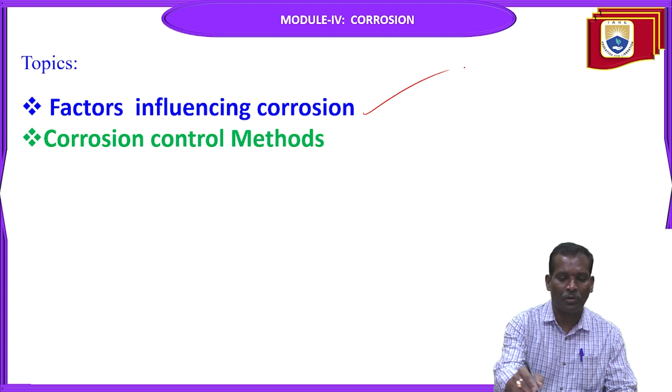So today I want to discuss the main factors influencing corrosion, the factors affecting corrosion, and then the controlling methods: how to control and prevent this corrosion. In the last session, I discussed the types of corrosion and the mechanism of corrosion. So today's topics are factors influencing corrosion and corrosion control methods.

So there are some main factors affecting the rate of corrosion. The rate and extent of corrosion mainly depends upon the nature of metal and the nature of environment. That's why we should learn the metal properties. What are the important properties of metal? First of all, you should know the material classification. What do you mean by metal? What do you mean by non-metal? What is the composition of the particular metal?

Suppose you want to design a component in mechanical engineering; first you should know the mechanical properties of the particular metal you are using: the strength, hardness, fatigue property, plasticity. All these properties you should know before you start the design. That's why the rate and extent of corrosion depends upon the nature of metal, which type of metal you are using, and the nature of environment, the atmospheric and working conditions. That is also a main factor affecting corrosion.

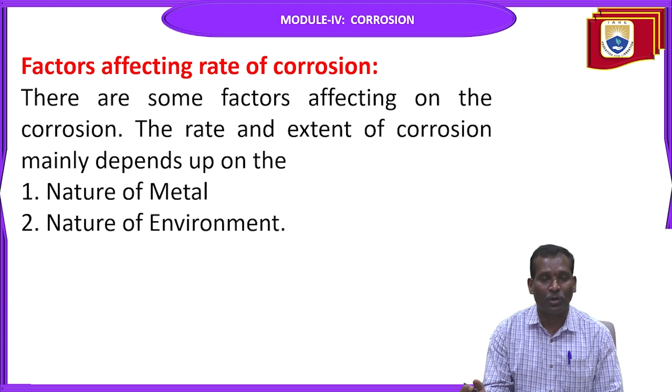So the factors affecting rate of corrosion are the nature of metal and the nature of environment. We will see here in tabular form. Nature of metal: purity of the metal. Nature of environment: temperature. The physical state of metal is nature of metal. Then the humidity in air, the atmospheric condition. Next, in nature of metal: nature of oxide film, position of metal in galvanic series, relative areas of anode and cathode, solubility of the product of corrosion, and electrode potential. All these things you should know.

You should learn about the nature of metal, because the rate of corrosion depends upon the nature of metal and the nature of environment. So purity of metal, physical state of metal, nature of oxide film, relative areas of anode and cathode, the small area and larger area of anode and cathode. The mechanism depends upon this area of anode and cathode, the solubility of product of corrosion, and electrode potentials.

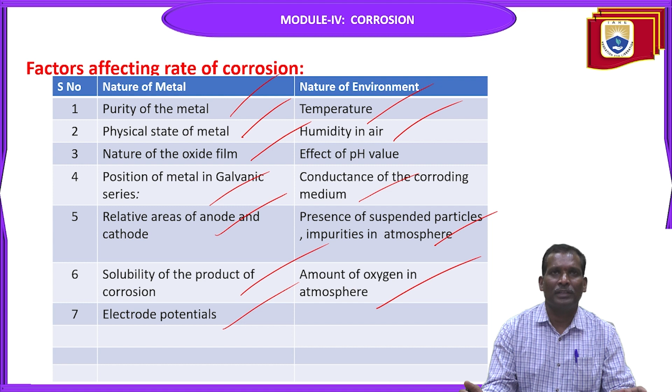Without knowing the nature of metal and nature of environment conditions, suppose we have designed a particular component and used it for a specific application, then ultimately after some time it will be corroded. Why? Because you are not considering the nature of environment or the nature of metal. That's why you should know the important factors before using it for the particular application. Then only it will be safe.

The factors due to nature of metal, one by one we will see. The first one is purity of metal. Heterogeneity of the metal is due to the presence of impurities which form tiny electrochemical cells at the exposed parts, and the anodic parts get corroded.

The second one is electrode potentials. The metals with higher reduction potentials do not corrode easily. They are noble metals like gold, platinum, and silver, whereas the metals with lower reduction potentials readily undergo corrosion, for example zinc, magnesium, aluminum, etc. Metals having higher reduction potentials do not corrode very easily; they have strong protection against corrosion.

The position of metal in galvanic series. Metals which possess low reduction potentials and occupy the higher end of the galvanic series undergo corrosion easily. In the previous case we have seen that high reduction potential metals do not undergo corrosion easily. So metals which possess high reduction potential and occupy the lower end of the galvanic series do not undergo corrosion. They get protected.

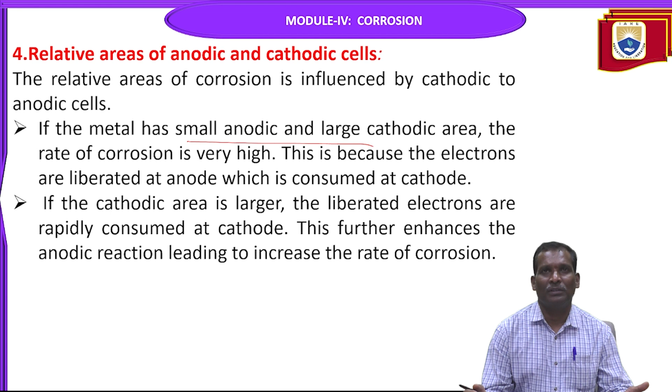Next, physical state of metal. Metals with small grain size have more tendency to undergo corrosion. Metals with more stress or strain also undergo corrosion easily. So this physical state of metal is studied in intergranular corrosion. So this intergranular corrosion depends upon the grain size.

So in the physical state of metal, the small grain size has more tendency to undergo corrosion. Similarly, the large grain size has low tendency to undergo corrosion. So this is one important thing in the physical state of metal.

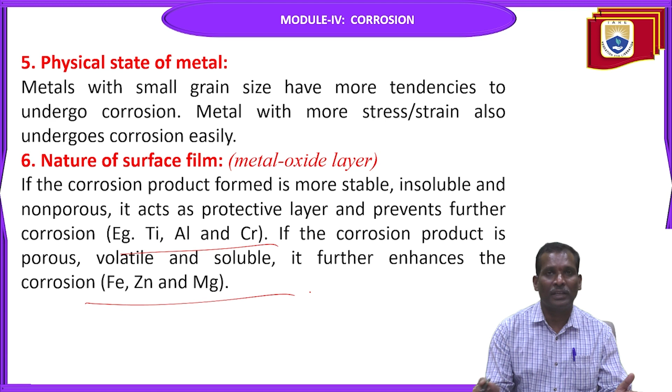Next, nature of surface film, also called as this metal oxide layer. If the corrosion product formed is more stable, insoluble, and non-porous, it acts as protective layer and prevents further corrosion. So example, Ti, aluminum and chromium. If the corrosion product is porous, volatile and soluble, it further enhances the corrosion. So ferrous, zinc and magnesium. The previous all points come under the nature of metal.

Now the second one is the factors due to nature of environment, temperature. So the rate of corrosion reactions increases with increase in temperature and decreases with the decrease in temperature. The rate of corrosion depends upon these reactions, temperature value. The reactions depend upon this temperature. If the temperature increases, some metals undergo corrosion.

Similarly, the humidity in air, the moisture or humidity present in atmosphere furnishes water to the electrolyte, which is essential for setting up of an electrochemical cell. So suppose if more humidity in the air, the rate of corrosion is also very high. If humidity is less, the rate of corrosion is very low. So that's why you should know the humidity percentage in the air before using the product. The oxide film formed has the tendency to absorb moisture, which creates another electrochemical cell. So all this comes under nature of environment.

Next, pH value. The pH value of the medium has the greater effect on corrosion. Acidic pH increases the rate of corrosion. The basic pH decreases the rate of corrosion. So that's why the pH value is very important. So when using the product in different environmental conditions, you should know the value of this pH.

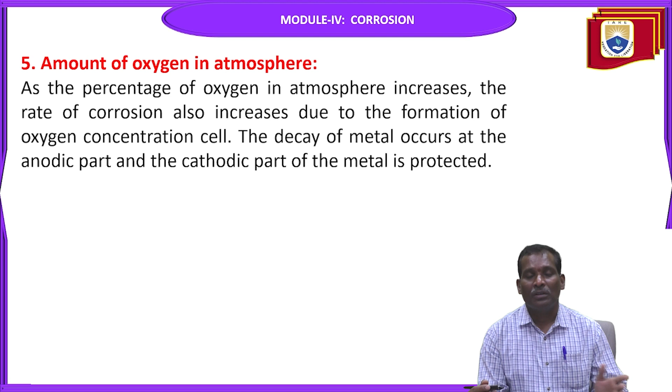Next, amount of oxygen in atmosphere. As the percentage of oxygen in atmosphere increases, the rate of corrosion also increases due to the formation of oxygen concentration cell. The decay of metal occurs at the anodic part and the cathodic part of the metal is protected. So that's why the amount of oxygen in the atmosphere is also one factor affecting the corrosion.

Next one, corrosion control methods. So how to control this corrosion we will see in this PPT. Electrochemical protection or cathodic protection. The principle involved in the electrochemical protection or cathodic protection is to force the metal to behave like a cathode. Again, this electrochemical protection or cathodic protection is classified into two types. One is sacrificial anodic protection and another one is impressed current cathodic protection.

So the main principle involved in electrochemical protection or cathodic protection is to force the metal, which metal we are using, to behave like a cathode. First we will see the sacrificial anodic protection. In this method, the metallic structure to be protected is made to behave like a cathode by connecting it with more active metal. So the active metal is anodic metal, so that all the corrosion will concentrate only on the active metal.

So in this method, to protect the base metal, you force it to behave like a cathode by connecting it with another, more active metal, that is, an anodic metal. So in this process, what will happen? The corrosion will concentrate on this active metal at the anode. In this case, the cathode parts will be safe. So like this, you can protect the part, the metal, from corrosion.

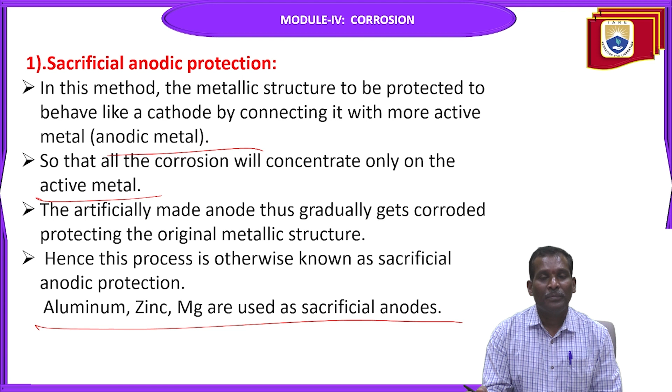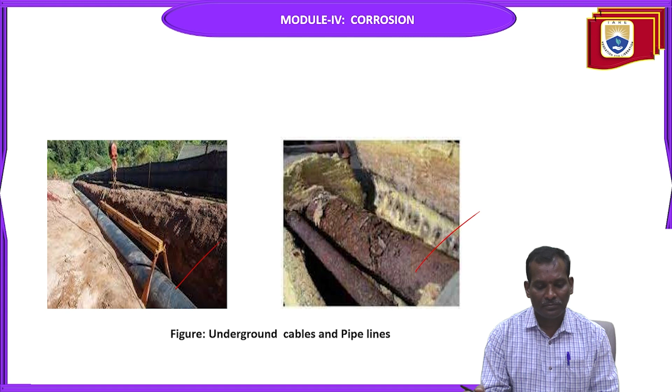See, underground cables and pipelines are protected from corrosion by using this sacrificial anodic method. You can see the corroded part in this diagram of cables and pipelines. An important application of this method is protection of underground cables and pipelines from soil corrosion.

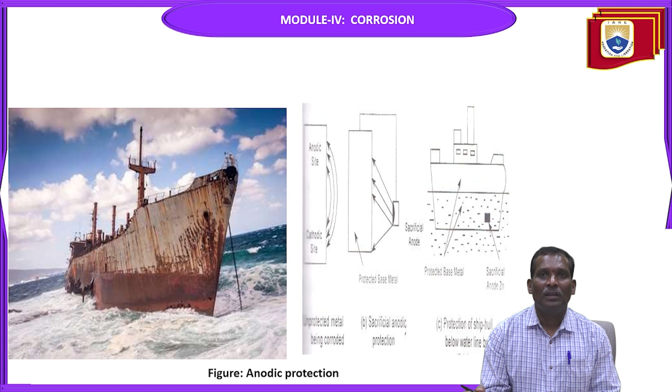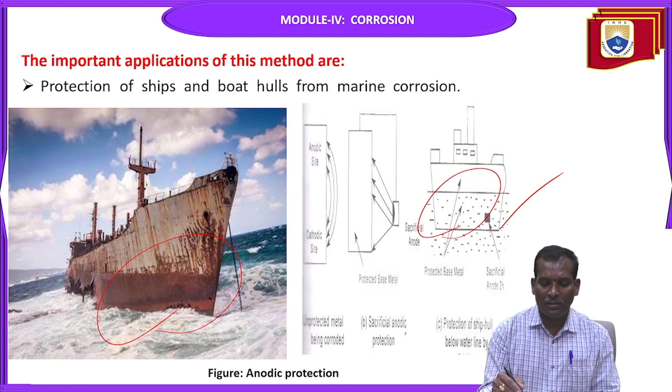Another application is protecting ships and boat hulls from marine corrosion. Here in this diagram you can see the protection of the ships. The sacrificial anode is zinc metal, and the base metal is protected from corrosion by this sacrificial zinc anode. This is sacrificial anodic protection of the ship hull below the waterline.

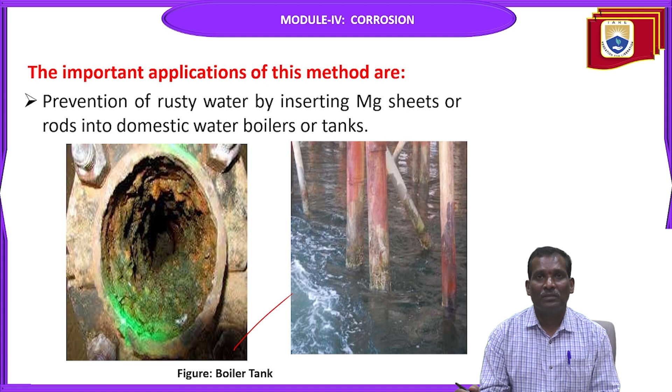So the next one is impressed current cathodic protection, the second method. In this method, an impressed current is applied in the opposite direction of the corrosion current, which passes through the metal, to nullify it. And the corroding metal is converted from anode to cathode.

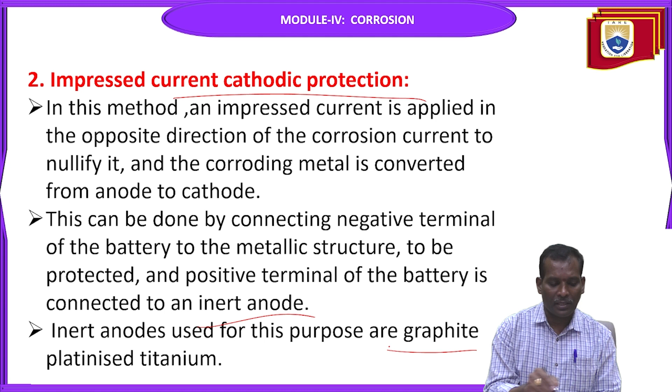This can be done by connecting the negative terminal of the battery to the metallic structure to be protected, and the positive terminal of the battery to an inert anode. Inert anodes used for this purpose are graphite and platinized titanium.

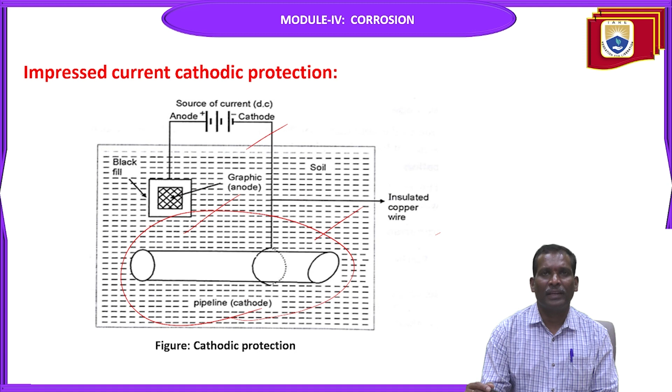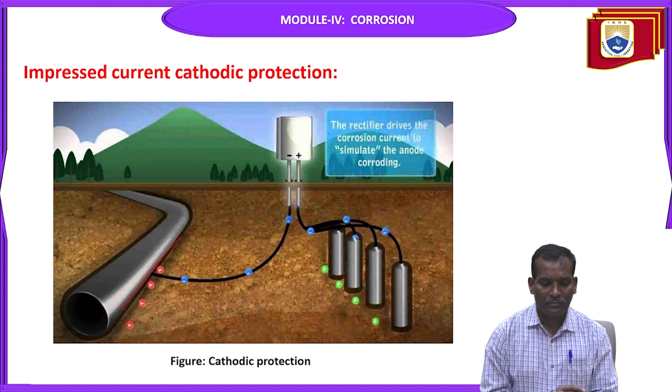In impressed current cathodic protection, the rectifier drives the corrosion current to simulate the anode corroding. In this diagram, the protected pipeline is shown.

The anode is buried in a backfill containing a mixture of gypsum, coke breeze, and sodium sulfate. The backfill provides good electrical contact to the anode. The pipeline to be protected is shown here, with the anode and backfill. Applications of impressed current cathodic protection are structures like tanks, pipelines, transmission line towers, underground water pipelines, oil lines, ships, etc.

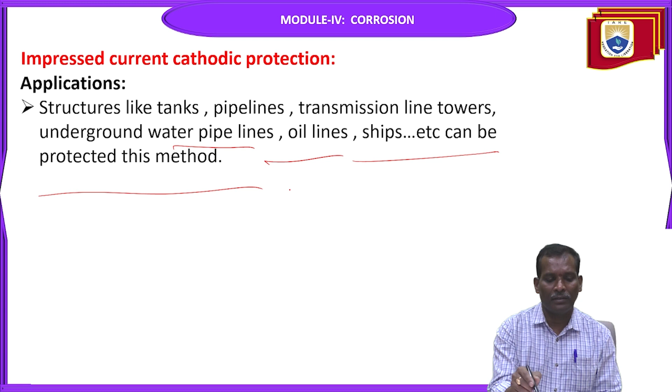So what is the difference between the sacrificial anode and impressed current methods? In the sacrificial anode method, an external power supply is not required, but in the impressed current method it is required. The cost of investment is very low for sacrificial anodes, but very high for the impressed current method. Sacrificial anodes require periodic replacement, while in the impressed current method replacement is not required as the anodes are stable.

Next, soil and microbiological corrosion effects are not considered in the sacrificial method, but in the impressed current method they are taken into account. The fifth point: the sacrificial method is the most economical, especially when short-term protection is required, while the impressed current method is well suited for large structures and long-term operations.

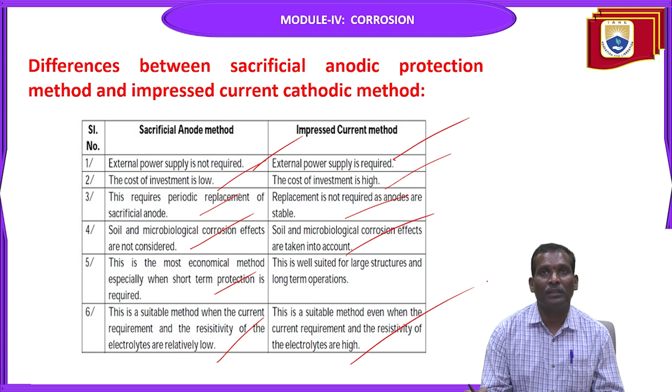The sixth point: the sacrificial method is suitable when the current requirement and resistivity of the electrolyte are relatively low. So wherever it's not possible to use current, you can use the sacrificial anode method. But the impressed current method is suitable even when the current requirement and resistivity of the electrolyte are very high.